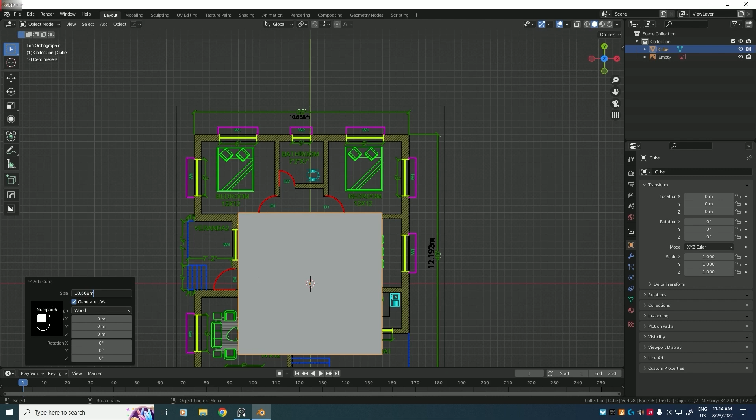Now we have got our x-axis scaled, so now we have to scale it along the y-axis too. Press Tab and get into edit mode. Now we can see our measurements - to enable that, click on this overlays panel and click on tick this edge length mark. That's it.

Now we are getting our measurements correctly. So now we have to scale it along the y-axis, so select our y-axis vertices in x-ray mode. It's important, you have to toggle on the x-ray mode. Shortcut is Alt Z.

Now select our top vertex and we have to scale it 12.192 meter. Press G and press Y, and drag it towards the y-axis.

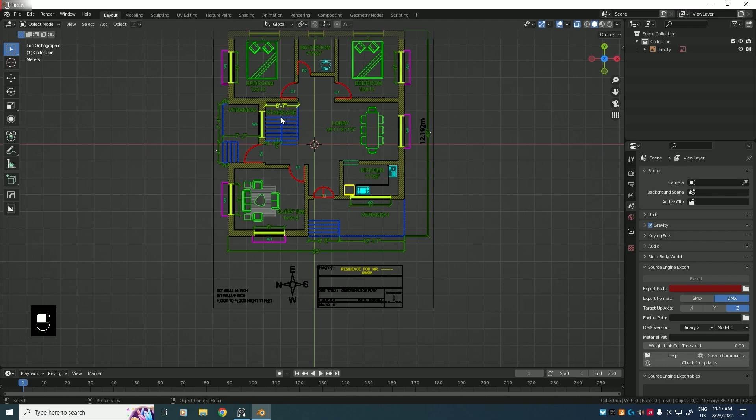Now press Shift plus A, mesh, Archipack, and click on Draw Wall - not the wall, it's Draw Wall. You can see it's outside wall, so I'm using this preset. To draw a wall in Archipack plugin, it's very easy.

Just click on the point wherever you want to start and just drag your mouse. Now we've got our wall, you can see. Let me turn off the X-ray mode. You can see we've got our wall, but it's not on our plan. Press G and Y to move our wall. That's it.

Now I need to adjust thickness of the wall. To do that, just drag this arrow like this.

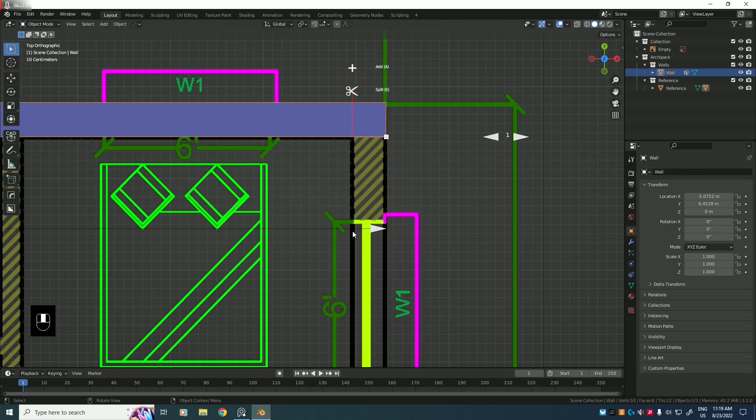Now we want to turn this wall toward this side, towards the y-axis. To do that, press here wherever you want to turn your wall, like this, and select our point like this, and drag your mouse. That's it.

I'm turning this wall towards this side. Press A again, press A to add a point, and drag it towards this side. That's it, pretty easy.

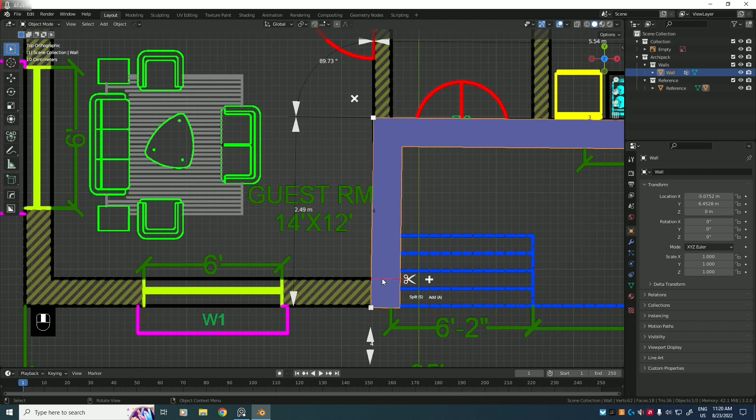Press A again to add a point and do that. Now we have got our outer wall traced out.

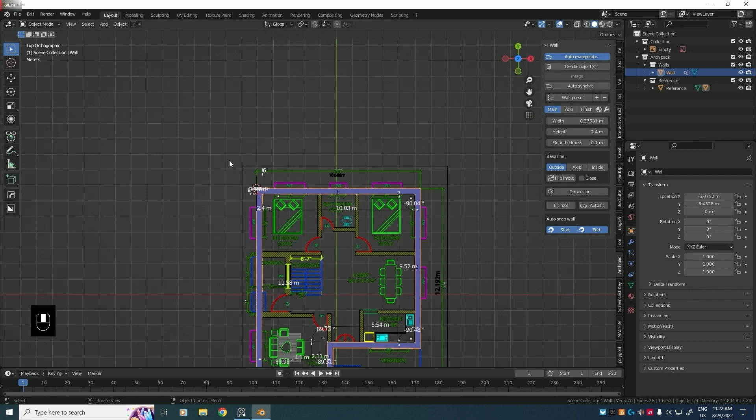Now as you can see, this wall thickness is equal to this wall thickness, so we can turn this wall toward this side.

Go to wherever you want to split and press S to split. Now we have got a cutout in our wall, so we can add a point. Press A to add point and turn our wall this side. That's it.

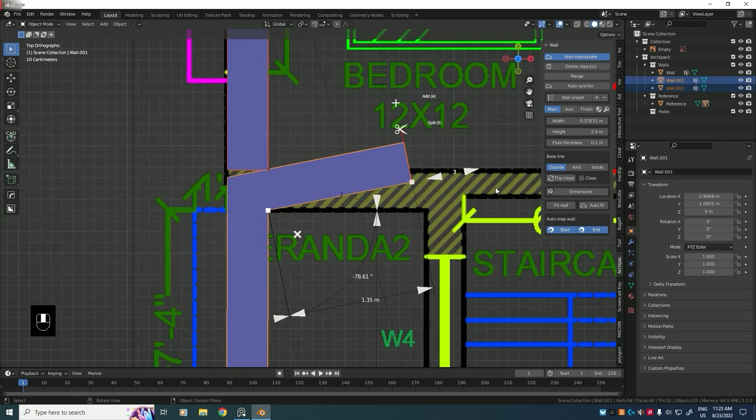Same goes with this wall too. Just click and drag. That's it. Press A to add point.

If you got a wall that's not into your plan, you can delete it just by splitting it. Press S to split and delete. Split again, and now you can. That's it.

Now here is our door, but I want this closed for now. Now our wall tracing is finished, only outer wall.

Shift A, mesh and archipack, and draw wall. I'm using this wall preset inside 15 by 240.

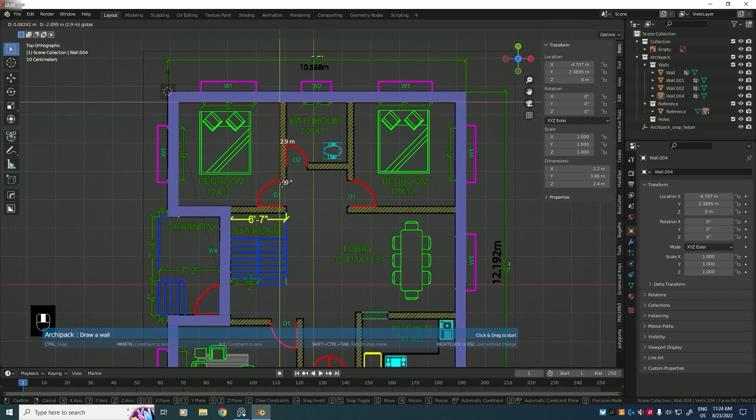I'm increasing this wall thickness. So, that's good.

Press A to add point, same as another wall, and drag it.

Now press S to split. A to add. That's it. A to add point.

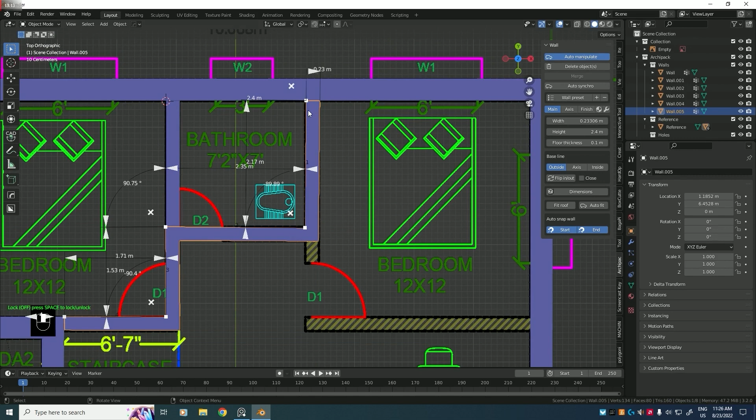You can adjust wall angle too. Now I want cut off in this wall, so press S to split and drag it like.

I'm going to delete this point so we can add it right here. So press on this cross and point is deleted. Now we can drag our wall like so.

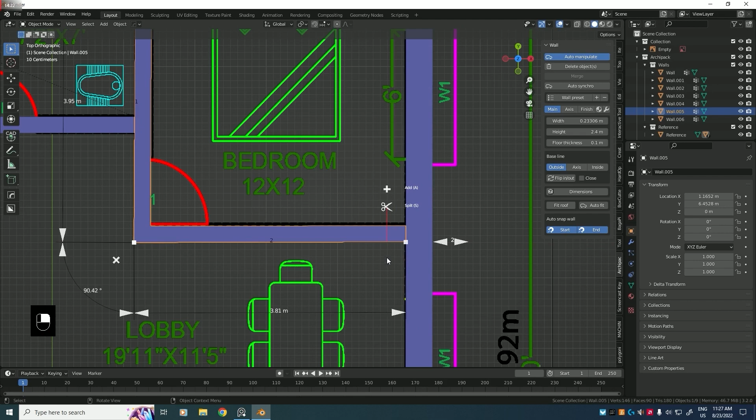Press A to add point. Same goes with these walls.

I'm duplicating this wall. Select the wall which you want to duplicate and press Shift plus D. Now press Y because we want to move it along the Y axis. Now press G and X. Drag it along our plan.

A to add cut in our wall. Drag it. To make it a perfect 90 degree, type -90. Our wall is perfectly 90 degree.

Now we have to make our kitchen, so I'm duplicating this wall. Shift D. We want to move it along the x-axis. To do that, we have to press G and then X.

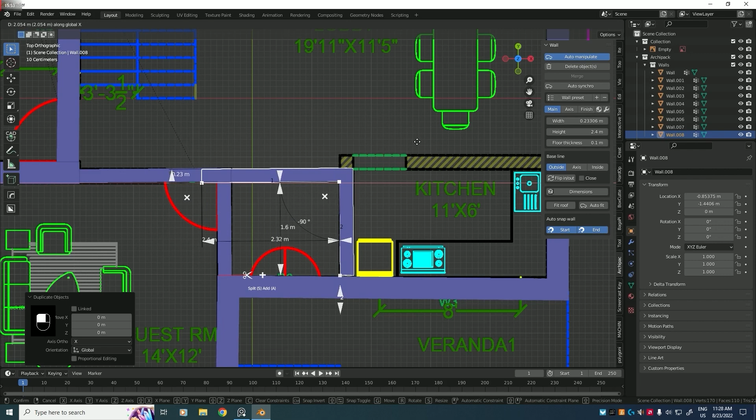That's it. Our walls part is now done. So now we have to make our floor. Let's do it.

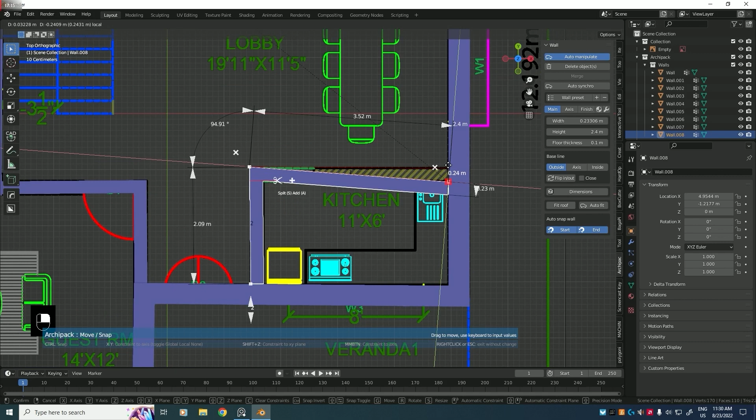Press Shift plus A. Now our walls are now done. Now we have to add floor plane. So let's do it.

Shift plus A, mesh plane. Now scale it. Press 7 to align it in the top view. G and Y to move it along the Y axis.

Now press Ctrl plus A to apply our rotations and scale along this, and select all transforms.

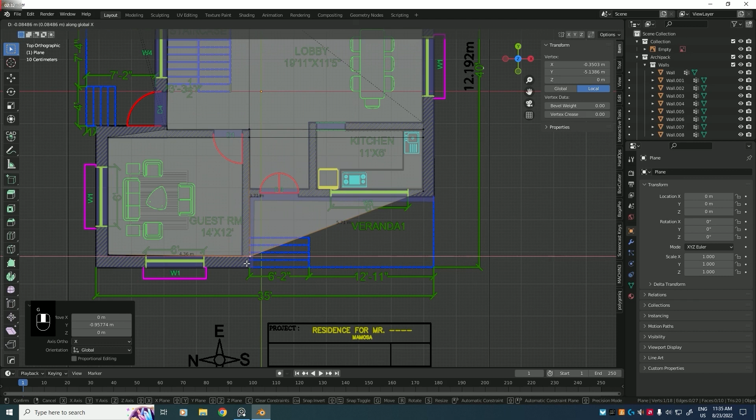Now we have got this face. We can delete this one. X and faces. That's isolated. That's decent.

For this part, we can use our knife tool. Press K to activate knife tool and select any point. Press A for angle snap and select our point and press enter. Now we can get rid of this triangle, X and faces.

Same goes with this. Tab, K for knife tool, angle snap. Press enter. Maybe I've got this vertices.

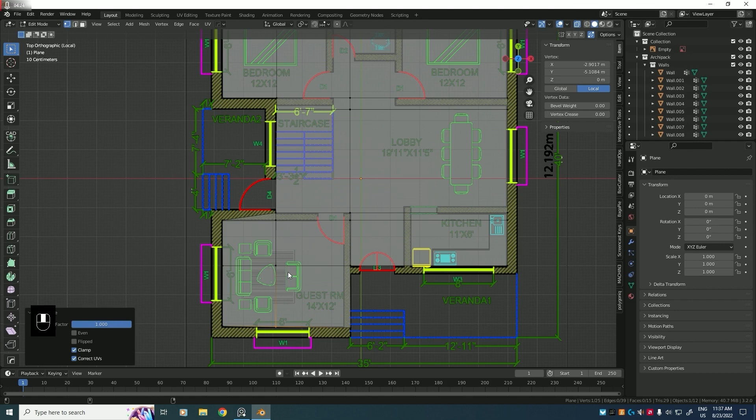Yeah, this is extra point. We don't need it. We can turn on auto merge. So now press double G and drag it. Now our point got merged.

This one is extra geometry, so we can delete this one too. X and faces. Same goes with these edges. We can dissolve this. X, dissolve edges. That's it. And same goes with this.

Press slash to go to isolate mode. Now we've got our plane, and that's perfectly quad based.

Now press on this wrench icon, the modifier icon, and add modifier solidify. Give it a bit of thickness, 0.01 is decent, and press apply.

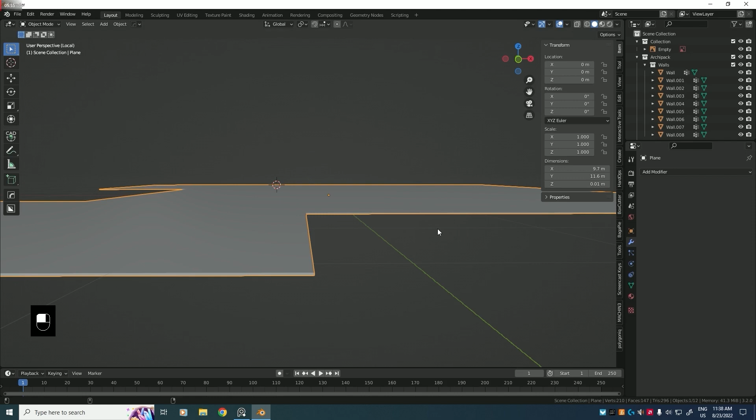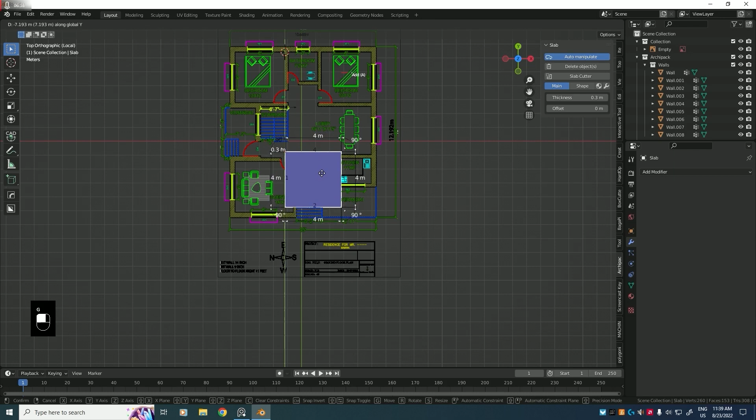Now we have to trace this part and this part. To trace this part, I'm isolating our plane. Press 7 to go to top mode. Shift plus A and go to archipack and select our slab. Right now I'm using slab, but you can use our plane too. Press G and Y to grab it towards this side, then G and X to move it towards the X axis.

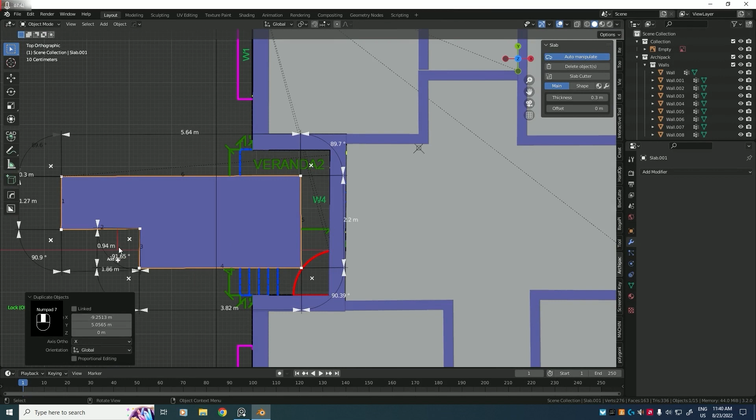It's the same as tracing our wall, so let's do it. Now A to add a point. We need one more point. That's it. Same goes with this side. I'm duplicating this slab with Shift plus D, and drag it along here. Press 7, I'm deleting these extra points. These are enough.

Again, I'm isolating the plane and our slab. Mouse and drag, that's it. Left mouse button and drag, that's it.

Architectural modeling is really simple. Here you don't need to worry about the topology and all that stuff. Just extrude the quads, that's it.

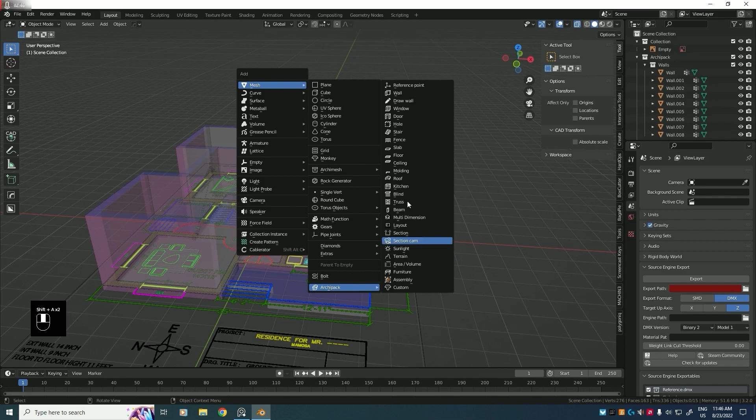Now it's time to add windows. Good old Shift plus A, mesh and archipack. Select window, choose whatever window you want, and don't forget to turn on the X-ray mode so you can align your window with the plan better. Now click where you want to add windows. It will automatically create the hole in the wall for the windows. We have boolean operation.

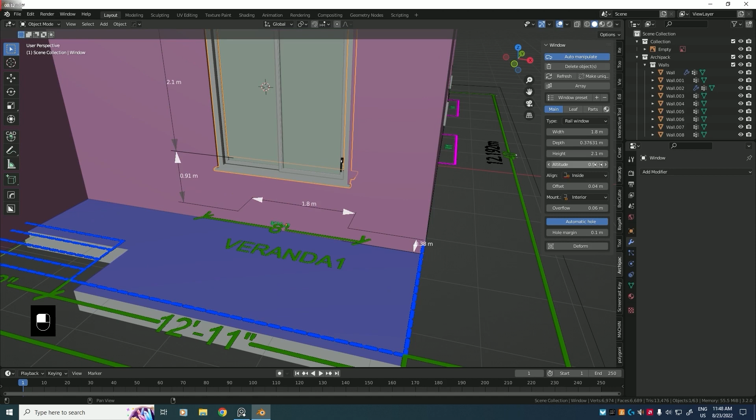Windows height from the bottom floor is gonna be around 2 to 3 feet, so I'm adjusting it to 0.91. That should be good. I'm adjusting the window height too, and pressing 7 to go to top view and turning on our X-ray to adjust our windows width and all that stuff according to our plan.

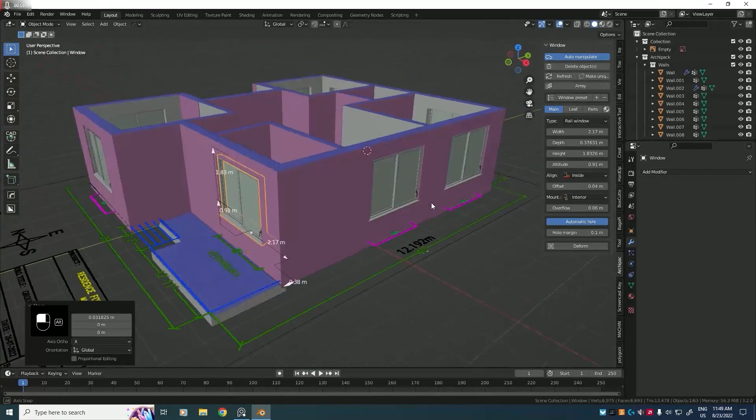Height is fine. As you can see, all our windows are aligned up perfectly.

Now the window that we have left is right here. I'm going to add this one. Again same step, Shift plus A, mesh and window. Right click to cancel it, and we've got our window.

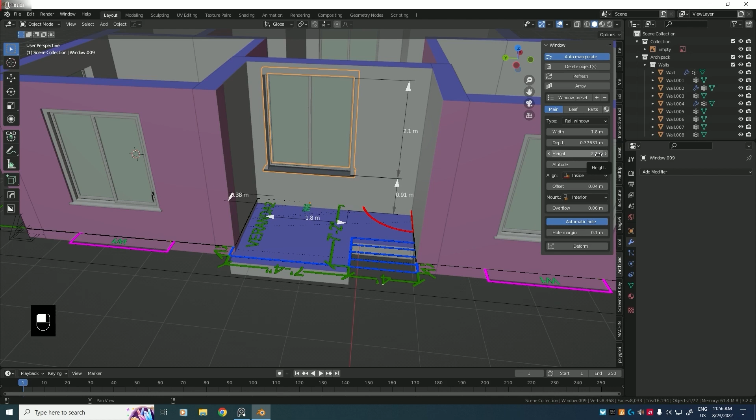Altitude should be the same, 0.91 meter, and the height should be less than other windows. And I'm going to make this one a single panel window, so just follow me.

So that's our single panel window, that's it. Now we have got our windows. Now we need to add doors.

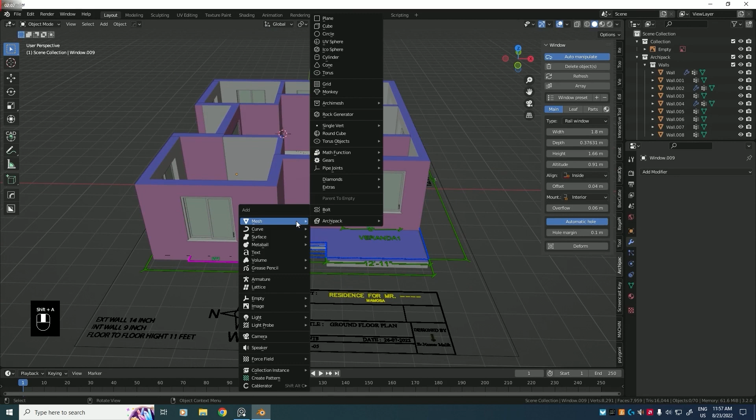So let's add those. Shift plus A, archipack, and click on door. I'm using this outside door. This is only for the hole purpose of boolean. One door is right.

In X-ray mode, I'm adjusting its properties. Press 7 to adjust it accurately. I'm increasing its width a bit. Press G and press X, that's it.

I'm increasing its height a bit, 2.4 something.

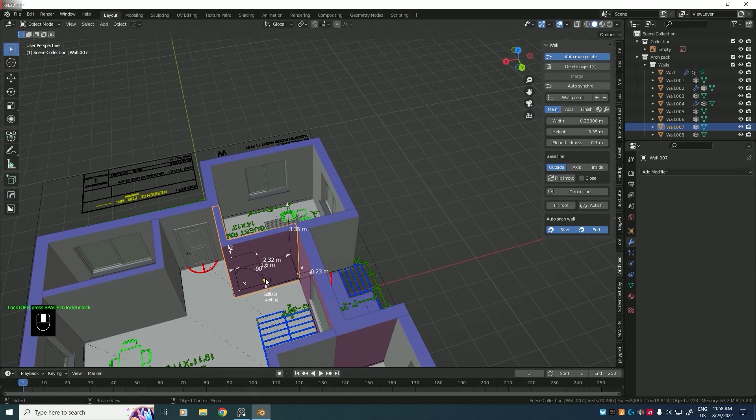Same goes with this. Mesh, archipack, and door. I'm using this door preset here. Don't forget to turn on your X-ray mode.

And our entrance door. As you can see, our doors part is done.

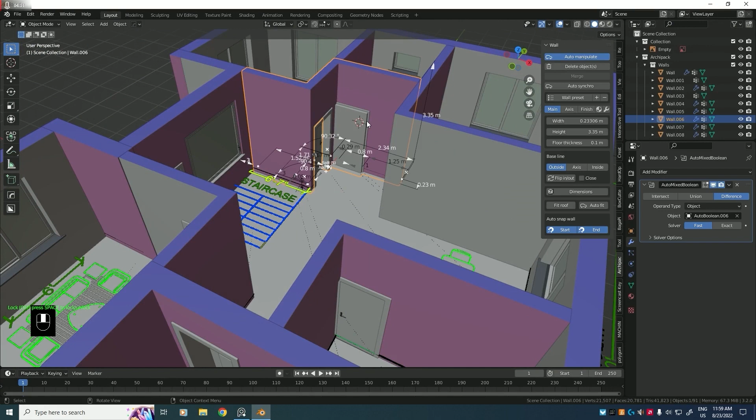Right now, as you can see, we got a bit of a problem. Just select and delete this. I'm going to apply this boolean here. Go to our modifier properties and click on apply.

Press Shift plus A, archipack, and go to door. Select the same door, or if you want you can choose another one too.

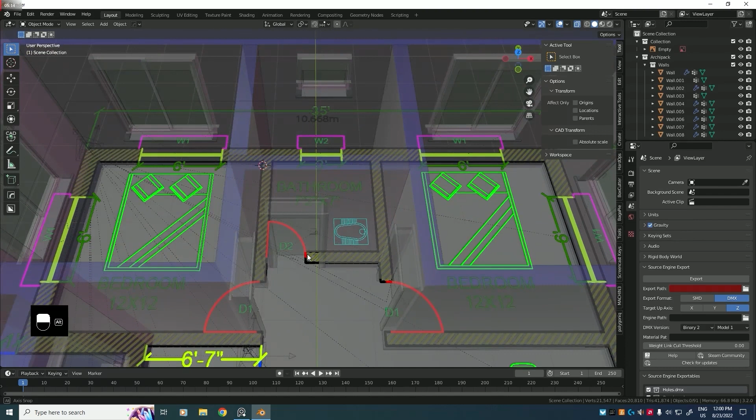Now we need to adjust its width. Just go to top view, press G and Y, then X, and place it according to our plan. As you can see, our door part is done.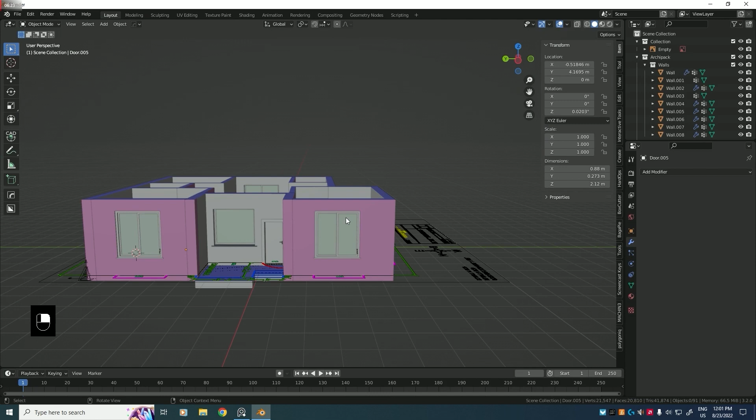Now it's time to add these stairs and the staircase. Press Shift plus A, mesh, Archipack and stairs. I'm choosing this concrete stairs.

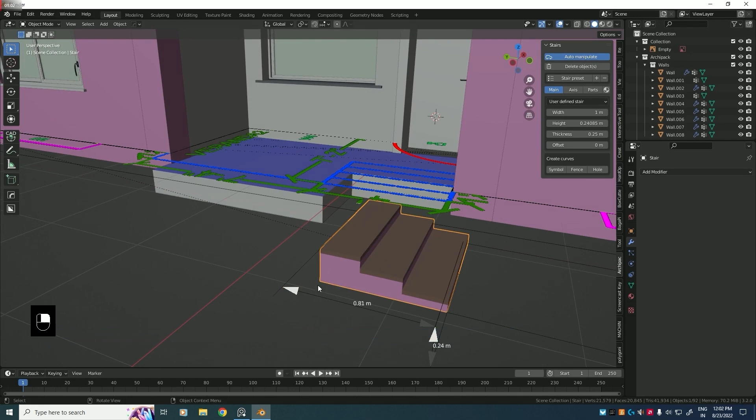Now we will have to adjust these stairs with it. Again go to top view, turn on X-ray.

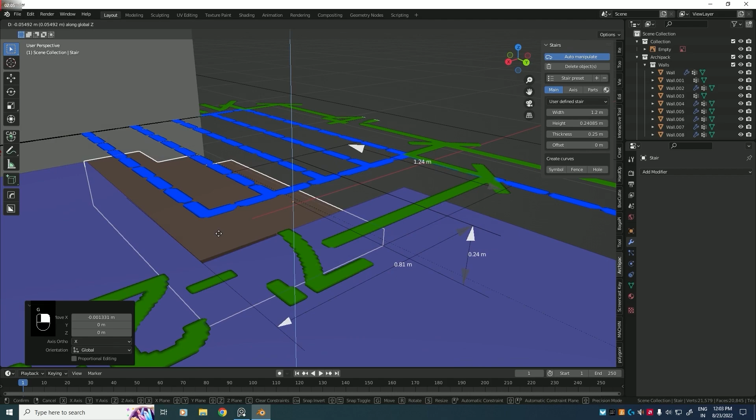Now I'm going to duplicate these stairs to another side too. So press Shift plus D, G, X, and G and Y. Z, 90. That's it.

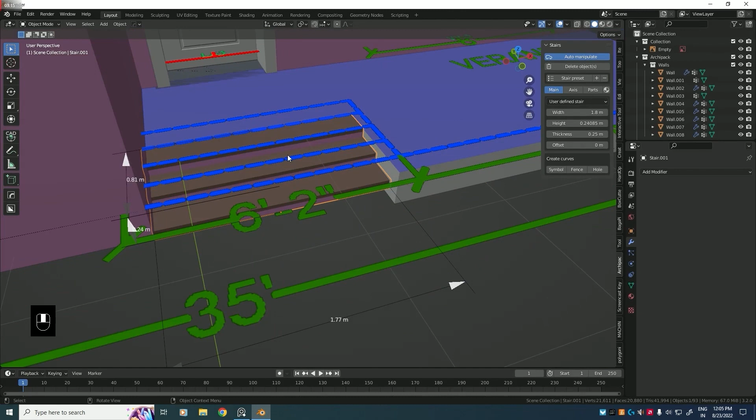Go to top view. You can turn on X-ray if you want. As you can see, there are more stairs, and they are bigger than normal on the other side, so we can adjust these two.

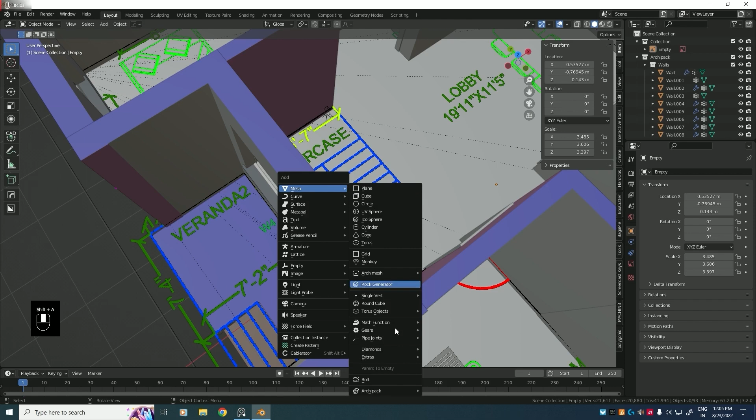Let's turn to these stairs. Shift and right click to adjust our 3D cursor. Now press Shift plus A, mesh Archipack and stairs. You can go with this L shape or U. I'm going with this U granite stairs.

Now flip the stairs towards 180 degree and align it according to our plan. Press 7 to get into the top view. Adjust the width of our stairs.

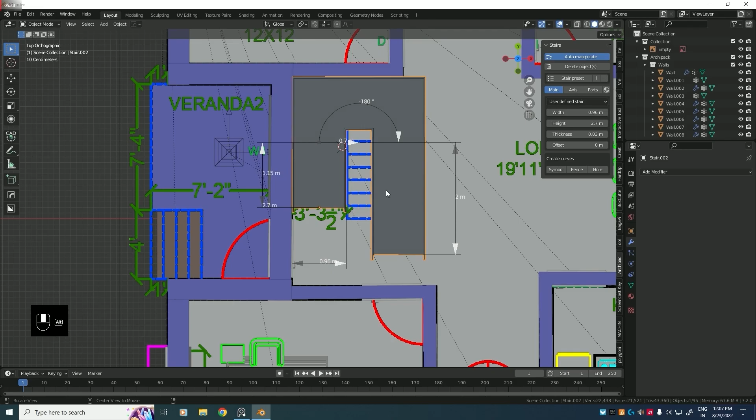Now we have to adjust this gap, so that's it.

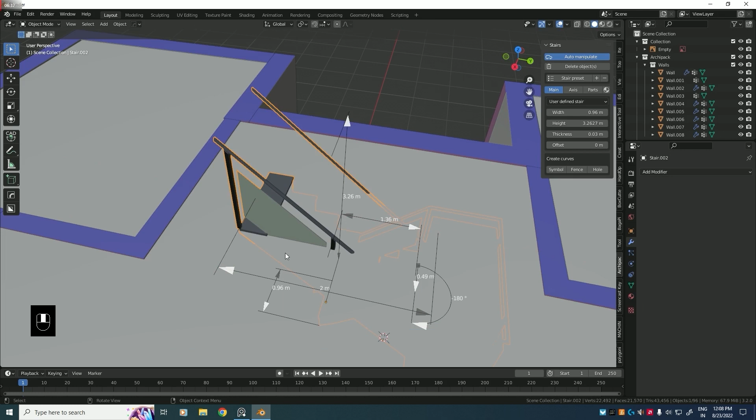For the sake of reference, I'm using this floor as our roof to adjust our stairs better. Press H to hide something. I'm isolating this stair.

Now we have got our stairs right, so let's proceed. Now press Alt plus H to unhide our floor.

Now we need a hole in here, so select our stairs and click on this. Press N to open this panel and then click on Archipack and click on hole.

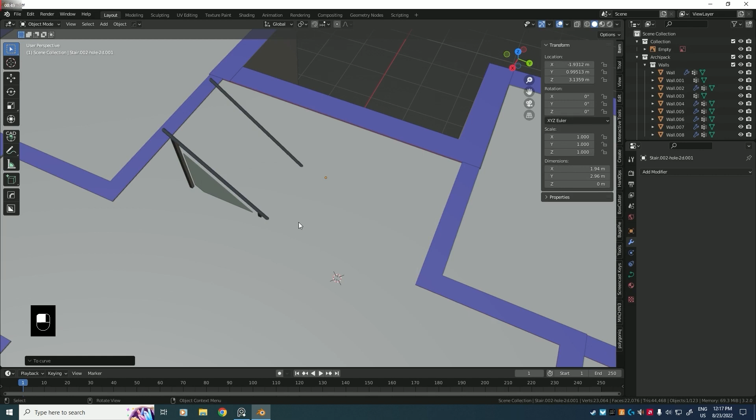Now we have got our hole. Go to object and convert it to mesh. Press slash to isolate it. Press E, Z to extrude towards Z direction.

Now select top edge loop and press F, and same goes with bottom. Press F, slash, select our plane and then this shape and press Ctrl minus.

Now you can hide this by pressing H. Now apply this boolean.

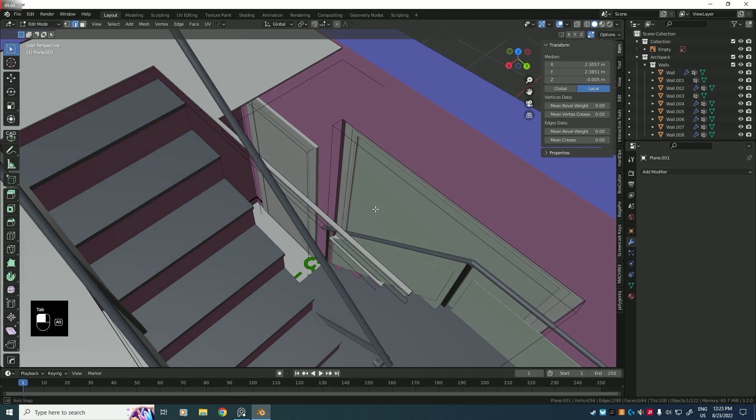Now G and Y. I'm going to join this. Now there.

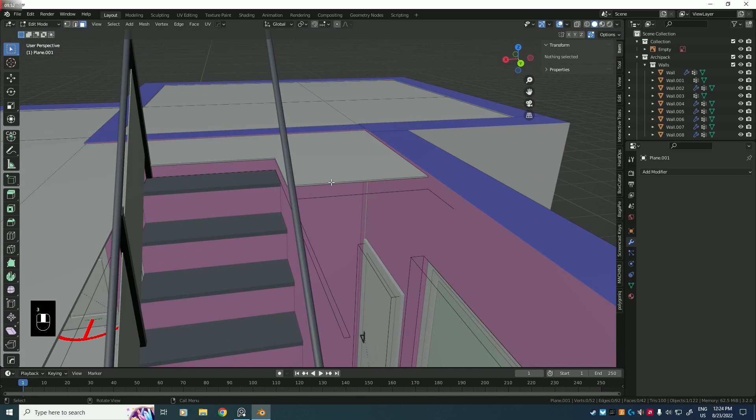I'm going to adjust this towards this side, G and Y, and get large. That's it.

Now press Alt plus H. Now you can do two things: one, you can trace out the walls again, or second, just duplicate the bottom floor walls. I'm going to duplicate these walls. At first I'm gonna select all of these.

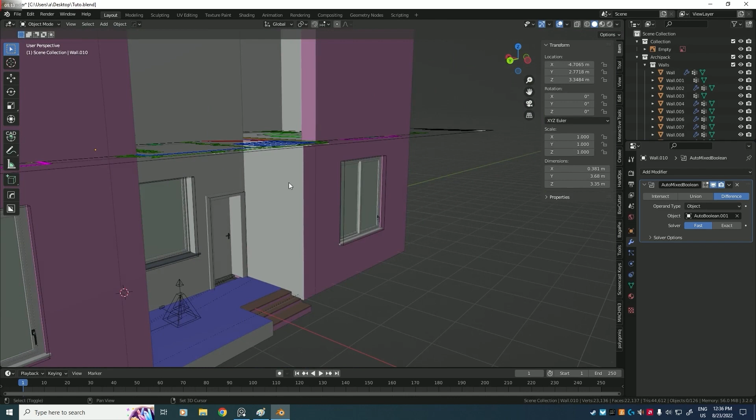Press Shift D and press Z. Align it in the right orthographic mode. That's it.

Now we have to add one balcony here, one in front, so let's add these first. For the balcony part, I'm using this slab again. I'm gonna duplicate this. Shift D and Z and duplicate.

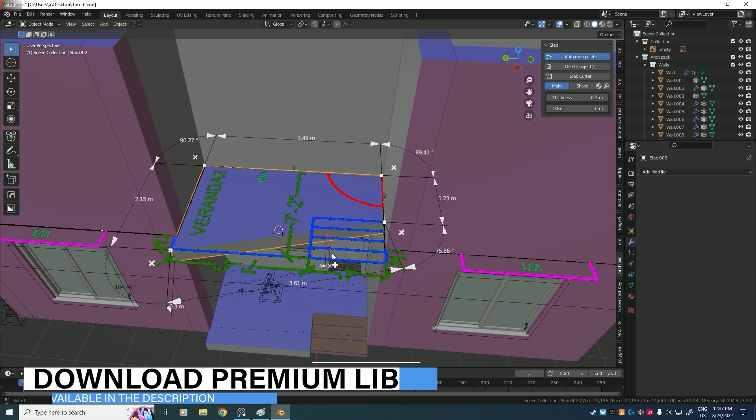Now I'm going to delete this point by clicking on this cross icon, and same goes with this. Press 7 and aligning this to here.

Now its thickness is a bit much, so I can decrease it. Press tab, G and Z.

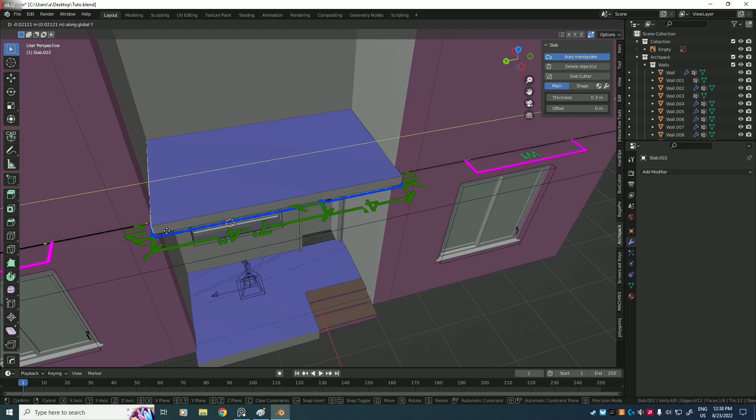To prevent Z fighting, I'm adjusting these faces too.

Now it's time to add fence here. Shift plus A, archipack and fence. I like this metal glass, so I'm choosing this. Let's isolate our slab and fence.

Let me turn on my screencast please, so you can see better. Don't know when this got turned off.

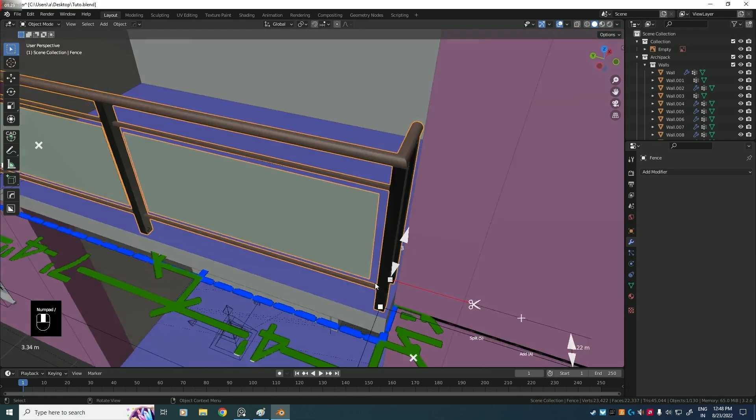As you can see, our fence is looking good. You can adjust our fence height from here.

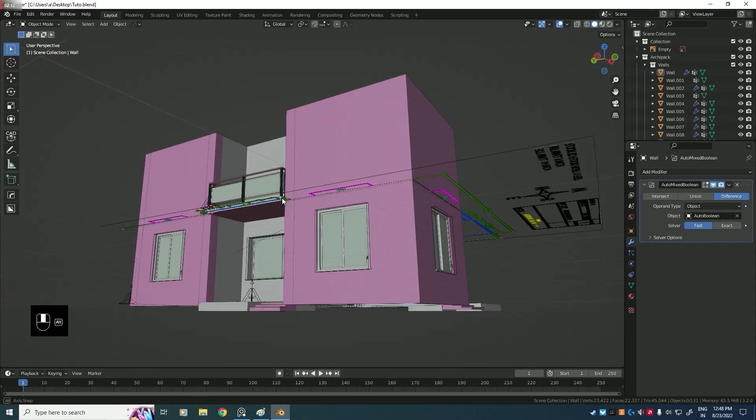Select and isolate it. Go to top view. Go to right hand side vertex mode and press G and Y. Same goes with here, G and X. G and X again.

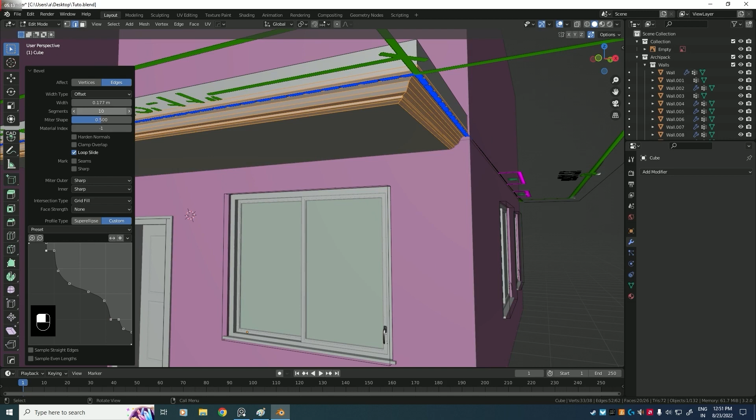I'm going to isolate it. Now it's a bit blocky type, so we have to give it a smooth shading. If you have the Hops plugin, you can just click on Control click and sharpen.

If you don't have this plugin, you can go with another method. Just click on here and click Shade Smooth. Then go to Mesh Properties and click on Normals and click on Auto Smooth. That's it. Do it on 60 degree.

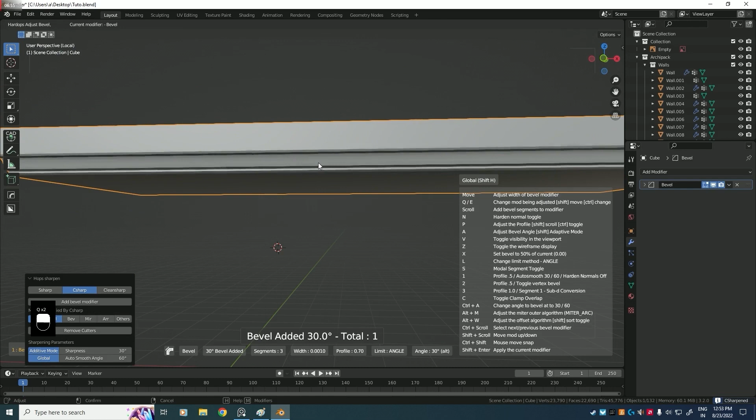Now we have got our slab, but this part shading is kind of wacky, so we have to adjust it. Select the bottom face and press I to inset it. Now it's looking good.

Select the top face and press Shift plus D and press P and selection. With a solidify modifier, give it a bit of thickness. Select the bottom part. Z and Z.

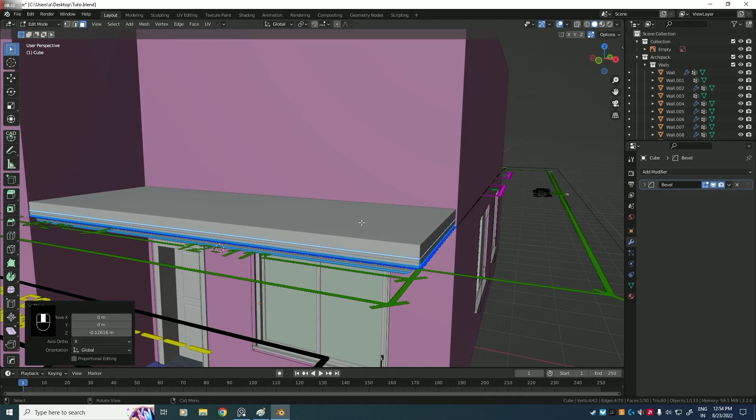As you can see, we've got our balcony on the front side too, like this. Now we can add our fence. We can apply our bevel.

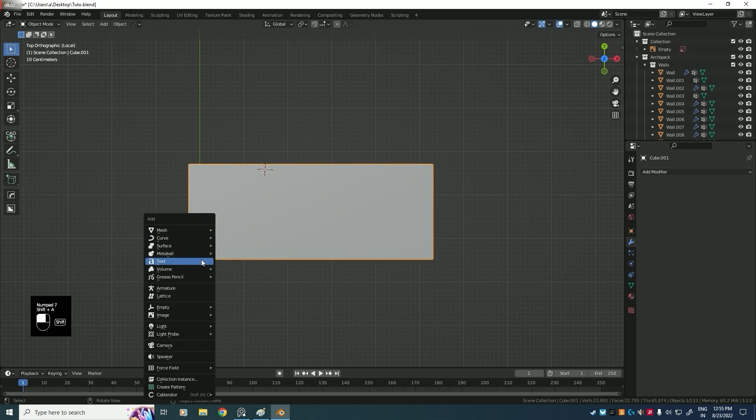Go to top view, Shift plus A, mesh, Archipack, and fence. Same fence. G into Y axis. Adjust its size like this.

A to add point. Just drag it wherever you want to. That's it. Now it's mid-air, so we can do G and Z.

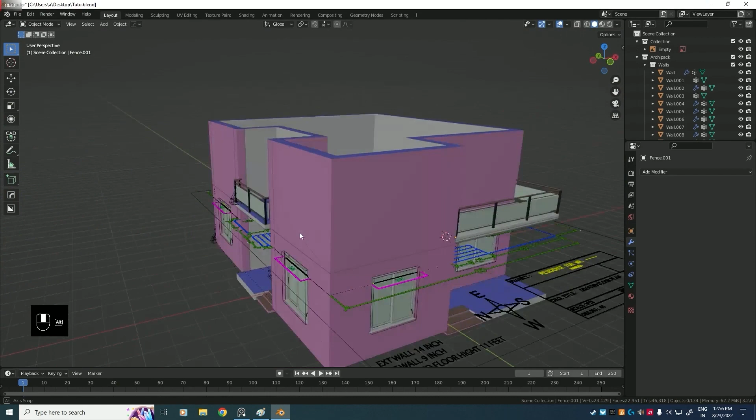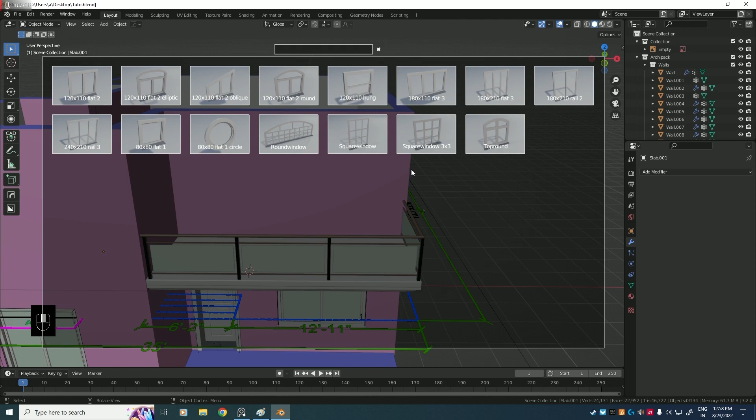Now it's time to add windows in these rooms. Shift A, mesh, Archipack and window. Now I'm using this square window 3x3.

Press N and click on Archipack. Now we have to adjust height and width of our windows, so let's do it. I'm adjusting the plan height a bit so I can see it clearly.

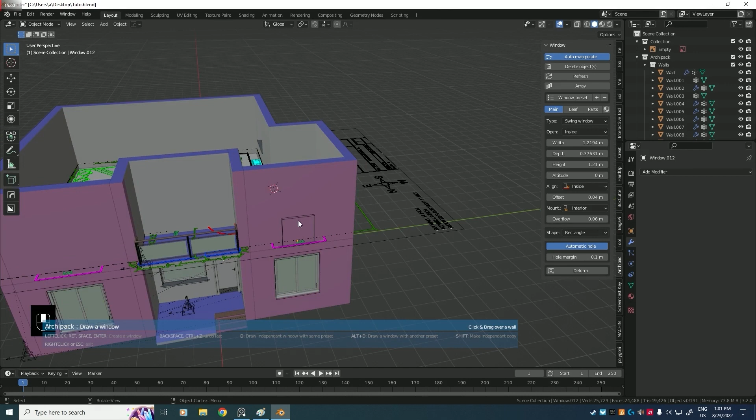Press Shift plus A, Archipack and window. These windows are going to be different, so I'm not using this. This part I'm going to use same panel window, or I can use this one.

Now it's time to adjust this window's parameters. That's good.

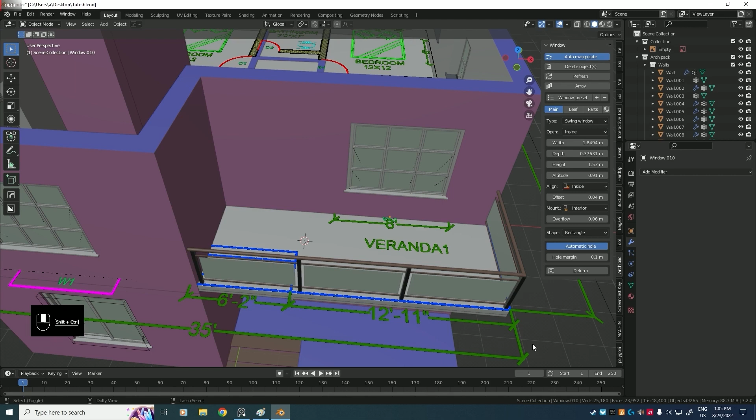Now let's add doors. Shift plus A, Archipack, and door. One right here and one to this side, so they don't look duplicated. As you can see, our boolean is a bit messing up, but we can fix it.

Now let's add one panel window here. Shift A, Archipack, window. Select this one.

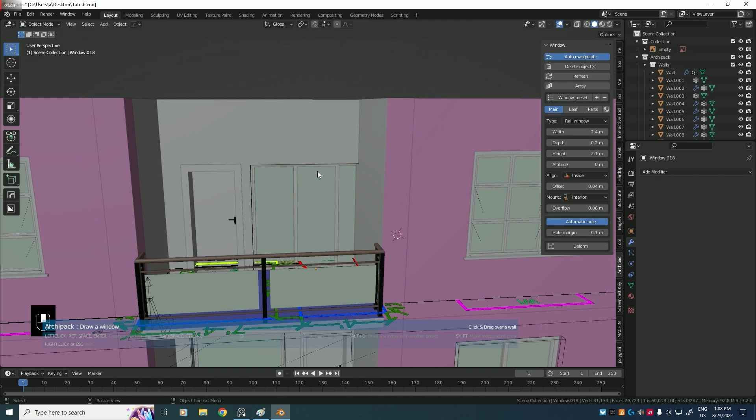Select window and adjust its parameters. We need to adjust its width because it's too much. I'm decreasing its leaf count, matching with the door.

Now let's add a roof to our house. Shift plus A, curve, and add line. Now isolate our line and house plan.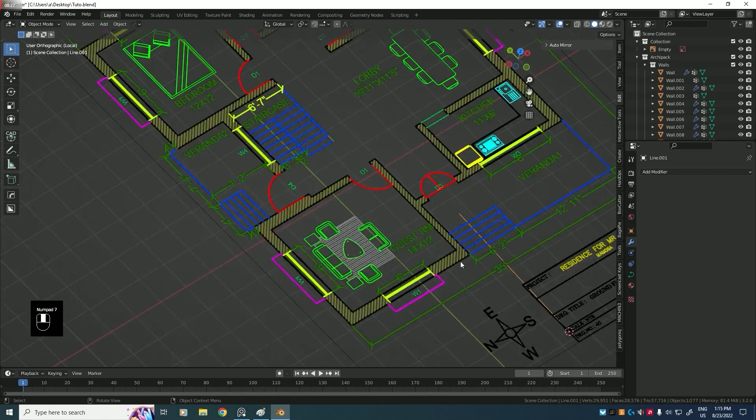Select our line and press S, Z and 0 to scale it towards Z direction and make it totally flat. Ctrl A or transform, set origin. We don't need to set origin.

Now let's trace our house walls with this line. Press Tab to go to edit mode.

Now select any handle and press S and 0. Now grab it by G and place it at any point of the house wall. Again, same for the other point of the house. Press S and 0.

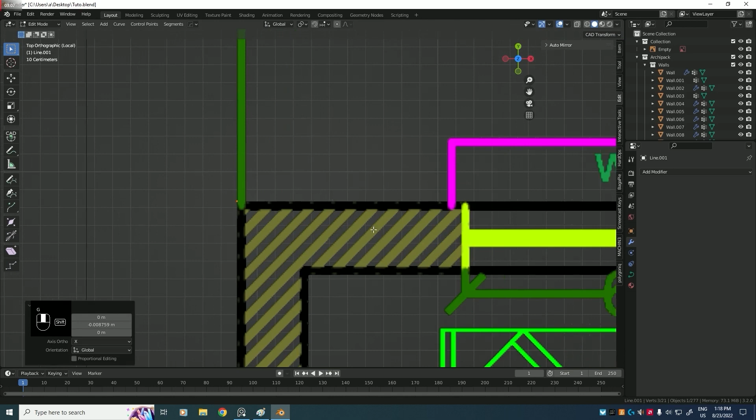E to extrude, same steps, and G to grab.

Now we have got our house outline, so we can use it for our house roof. So go to this create panel and click on draft.

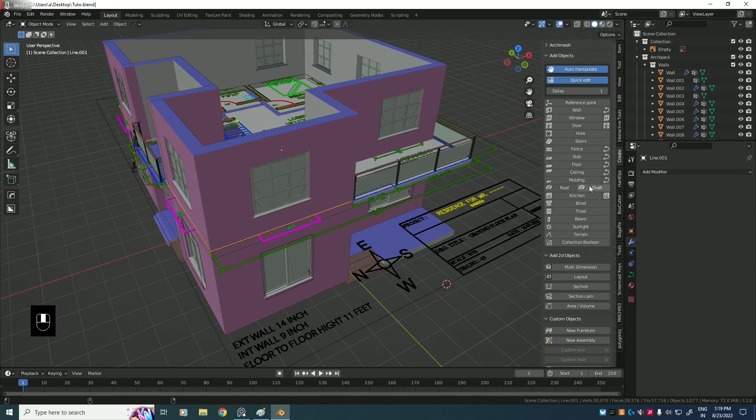Now go to Archipack and click on shape, and from curve you can select our curve by searching about it. Now here is our line, so we can select it. After we got our roof curve, now press Shift plus A,

Mesh, Archipack, and select roof. Choose any roof you want. I'm choosing this square. G and Y.

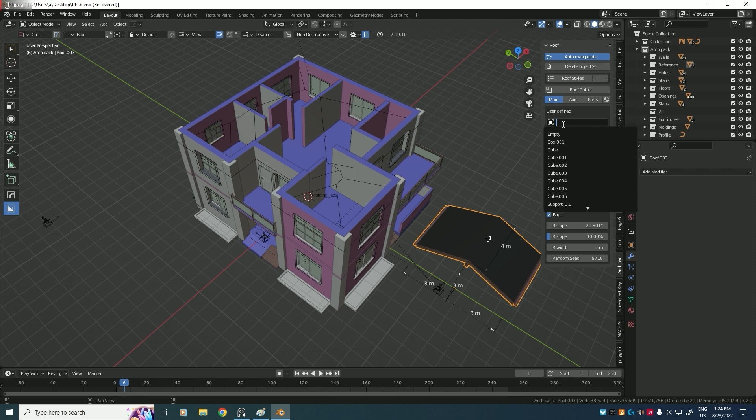Now go to Archipack and click on user defined. Search for roof draft. This one.

Now we have got our roof. So press Z. As you can see, our house is almost ready. Now you might ask how I created this one. So let me show you.

Press Shift plus A, mesh, add cube. Now you can use Boolean operation, or you can just go with normal.

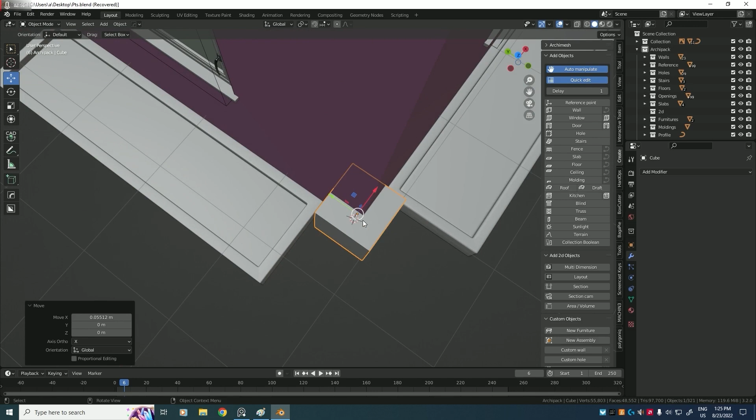Now press Ctrl A, all transforms, set origin to geometry, and then press Tab to go to edit mode. And press Ctrl plus R to add a loop cut, and then Ctrl plus R to add another loop cut. Now we have got 4 pieces of our cube.

As you can see, they are all in the center, so we can just delete one side. Go to X-ray, numpad 7, and delete one side, X and face. You will get shape something like this.

Press 2 to go to edge selection mode and select and double click on this edge loop and press F to fill it, just like this. Shade smooth it and then bevel it.

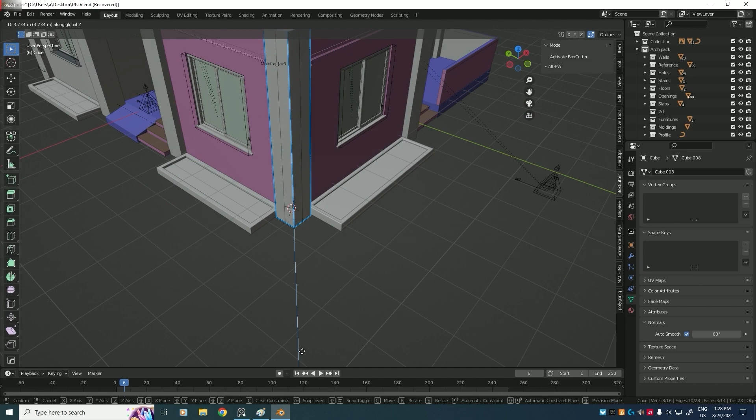Now press G and Z, just like this. You can apply this to all sides.

As you can see, we've got our house like this. Maybe I'll make another video on how to apply materials. Thanks for watching.